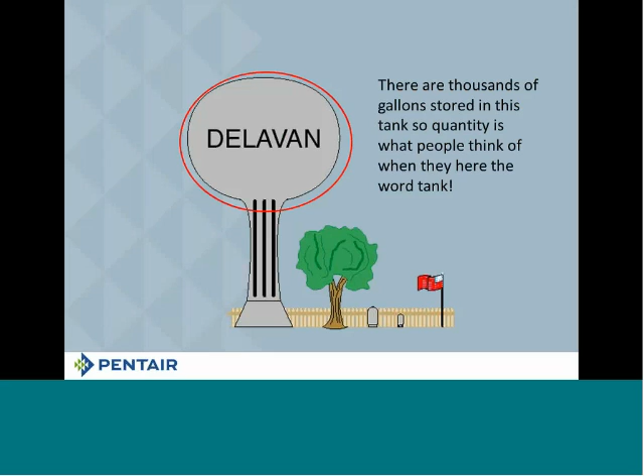When we look at this picture, you'll see the Delavan water tower. Most people see this water tower and think of the quantity of water it holds, thousands of gallons of water. So people think of a tank as being the water storage vessel. But tanks are really more than that.

What they really are is a pressure vessel. With this water tower, from the top of the water in the tower to the base, the ground level, that's the pressure we're going to have in our city systems.

So if we take that 115 feet of head that we've got here and divide it by our divisor, which is 2.31, we find that equals 49.78 PSI, which we'll round off to 50. So what we're basically saying is if I've got 115 feet of water in this water tower, there's 50 PSI on my system. Now, it would be absolutely wonderful if everybody had a water tower in their backyard.

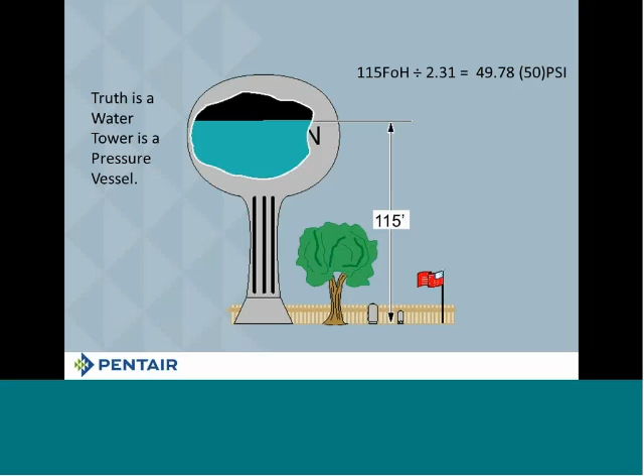Well, maybe not. Because of that, tanks were invented. This is what we call an air-over-water tank. Now, what that means, and we'll take a closer look at them in a minute, is that the air and the water are touching one another.

The next tank we're going to take a look at right next to it is called a pre-charged tank. In a pre-charged tank, there's a separator between the water and the air. And you're going to see what that does in just a couple of minutes.

On our next slide, I want you to see that there are some similarities between the two systems. For example, both systems are going to have a pressure switch on them. Now remember, all the pressure switch does is turn the pump on and turn the pump off. Both systems are usually going to have a pressure gauge.

I say usually because it's not required that you have one, although it should be. But most people have them in there because they want to see what pressure their system is at, and so they put a pressure gauge in there.

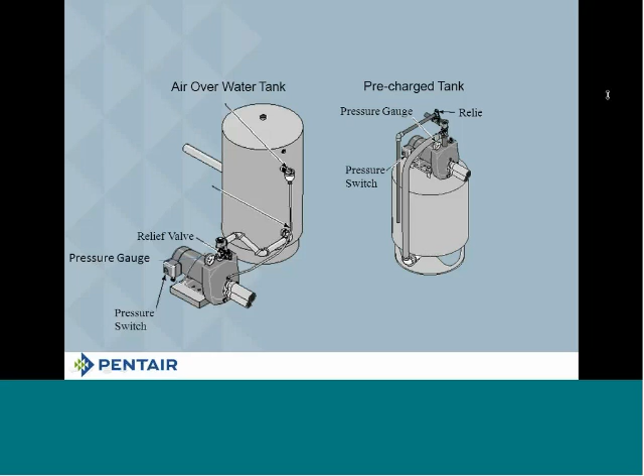If you don't have a pressure relief valve in there, shame on you. It is the cheapest insurance policy you're ever going to buy, so we would strongly encourage you to put some kind of pressure relief valve in. Should something happen and that pump not turn off, it can build up pressure that can hurt your system. So to eliminate that, make sure you have that pressure relief valve in place, just as a safety factor.

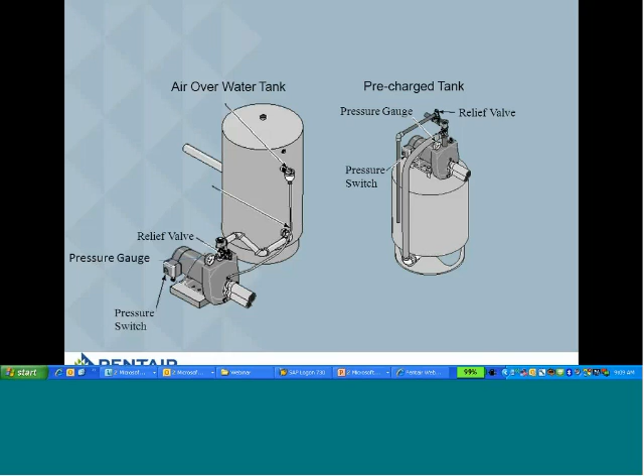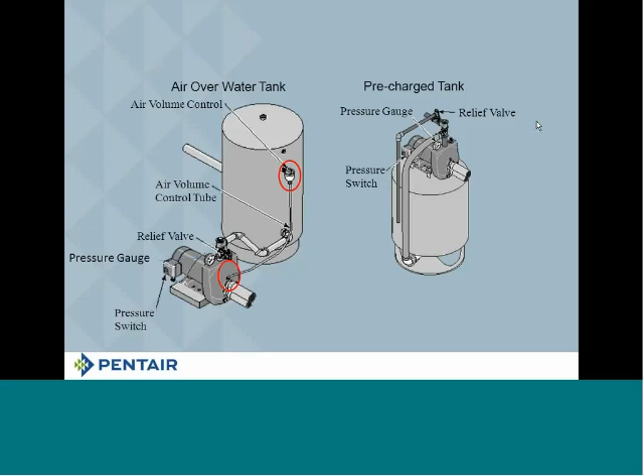Now let's start looking at a couple differences. On an above-ground system, that air volume control is going to be connected to the pump via a tube that gets connected to the suction side. We're going to show you how all that works here in a few minutes. That's part of our presentation.

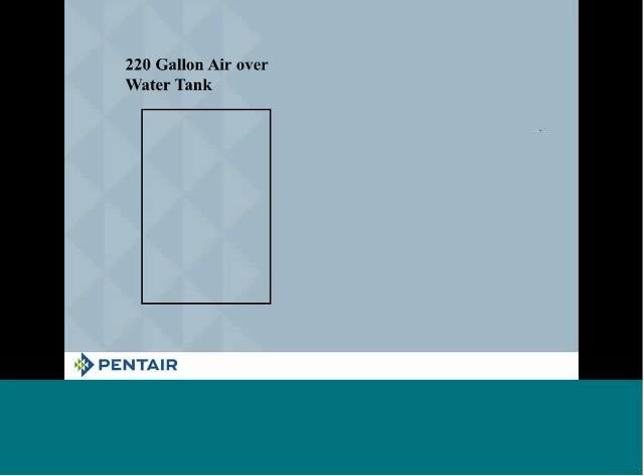So there are three basic things going on in this tank, and I don't want to call them separators because there really aren't separators in the tank. We're going to start out by telling you that this system is a 30-50 pressure system.

One of the three things in that tank is called drawdown. Drawdown is the usable amount of water you're going to have between 30 psi and 50 psi. So when the pump turns off at 50, the air pressure in the tank pushes that drawdown water out until you get to 30, and then it turns the pump back on.

So when they talk about a 30-50 pressure switch, that's what they're doing. Now, you may remember from hydraulic courses that water is incompressible. This next section is called compression water, which simply means we're going to use this water to compress something else. And of course, the other thing in this tank is air, so we're going to use that water to compress the air.

Now what happens is this: air molecules and water molecules are very similar, so of course the air molecules and water molecules start to mix. And as you pull water out of the tank, air comes out with it.

Now if you don't do anything about it, this is what's going to happen: you're going to start losing air and drawdown at the same time. Our picture here will show air and drawdown disappearing. When they disappear, the tank is now completely full of water.

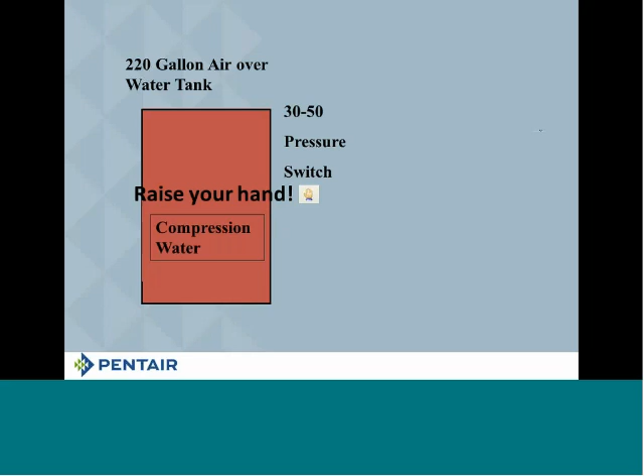So here's a question for you: what do you call a tank when there is no air in it? You call that waterlogged. Now, what's the real name for a waterlogged tank? The real name for a waterlogged tank is a big piece of pipe, because in reality, that's all that it is—just a big piece of pipe in your system.

So we're going back to our original tank here, and back to the fact that we've got some compression water. It's not completely full of compression water—we've got some air and some drawdown. Remember, we're running a 30-50 pressure switch here. With a 30-50 pressure switch in a 220-gallon air-over-water tank, according to Boyle's law, you should have about 26 gallons of drawdown. Remember, drawdown is the amount of water you get out of the tank between 50 psi, when the pump turns off, and 30 psi, when the pump turns back on.

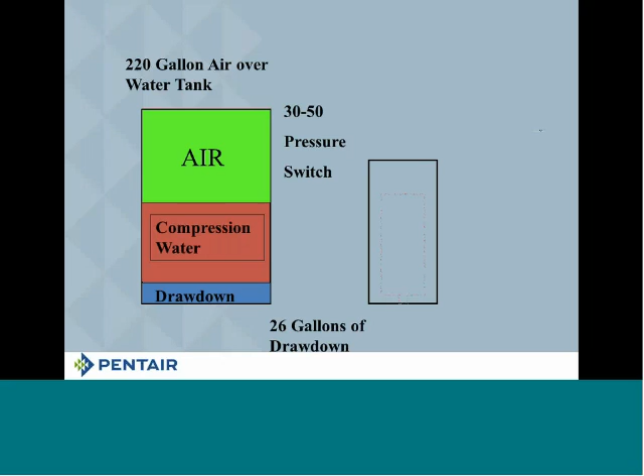This is a picture of what we're going to call a pre-charged tank. Remember, in our very first picture, you saw the two sitting next to one another—they have to share components. So while we're not going to put compression water in this pre-charged tank, we're going to use a separator. What the separator does is separate the drawdown water from the air.

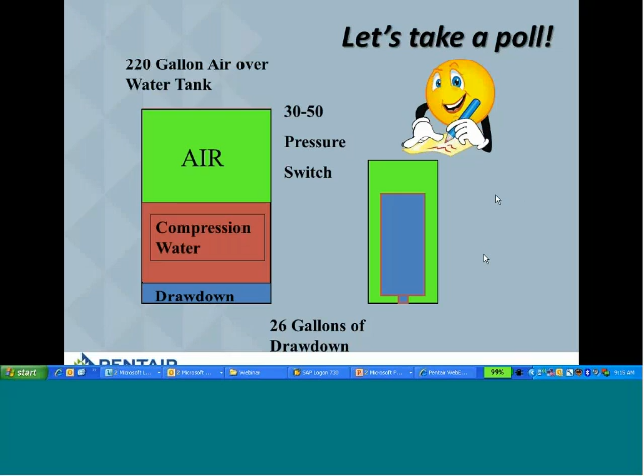At this point, we'd like to take a poll. Your choice is true or false: pre-charged tanks are less than half the size of their equivalent air-over-water tanks. True or false? Let's take a look at the answer—we've got 6 people saying true and 1 person saying false. I have to give it to the 6 people, that is a true statement.

Now I'm going to show you why the answer is true, because I always like to make sure you understand why something is happening. So first, we're going to take a look at that 85-gallon pre-charged tank versus a 220-gallon air-over-water tank. Remember, with a 30-50 pressure switch, both of these tanks will give you 26 gallons of drawdown. So here's a little math for you: if we take that 85 and divide it by the 220-gallon air-over-water tank, we find that it is only 38%, which makes it less than 50%.

Now, 85 gallons is a pretty good size tank. The next tank we'll talk about is the 19-gallon tank, which is equivalent to a 42-gallon air-over-water tank. So once again, if we do that math, we find that the 19-gallon tank is only 45% of the 42-gallon tank. So you can see the answer is true, and it will be true of any tanks you compare. If you're comparing a pre-charged tank to an air-over-water tank, you're going to save room—there's going to be a lot more room because it's less than 50% of the size.

Now, the next piece of math we're going to do is figure out what the usable amount of water is in each of these tanks.

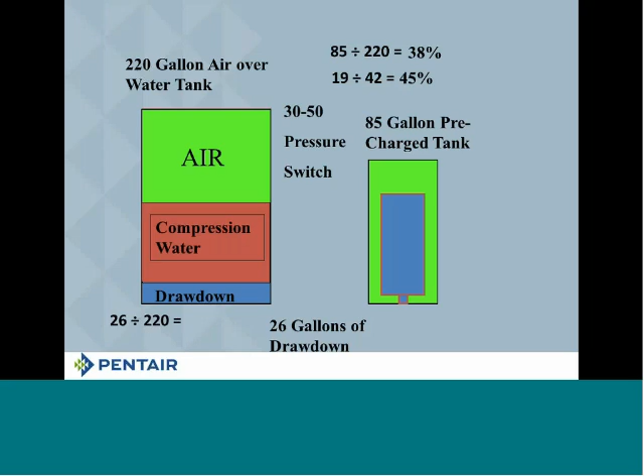So if you take your 26 gallons of drawdown and divide it by the 220 gallons possible in that tank, you get 11.8%. Basically, I tell everybody 12%. So approximately 12% of the tank size, and this goes for any air over water tank. If it is a true air over water tank, about 12% of the size of that tank is what you're going to get out of it for drawdown. So all you have to know is the total size of the tank, multiply it by 12%, and that gives you your drawdown.

Now, if we do the same thing on the 85-gallon tank, we'll take that same 26 gallons of drawdown and divide it by the 85 gallons that could possibly be stored in this tank, and you're going to find that we are now at 30.5%. I round that one down to 30%. So the important thing to remember is if you're running a 30-50 pressure switch on a pre-charged tank, as long as you know the actual size of the tank, you can take 30% of it, and that will get you pretty darn close to what your drawdown is going to be.

Now, of course, not everybody runs a 30-50 pressure switch. Some people want more pressure, so they run what's called a 40-60 pressure switch. The important thing to remember is in a tank with a 40-60 pressure switch, you're going to get 22 gallons of drawdown on that 220-gallon tank. If you take the 22 and divide it by 220, you'll find that it comes out to about 10%. Any size air over water tank, if you're running a 40-60 pressure switch with it, about 10% of that tank is what you're going to get for drawdown.

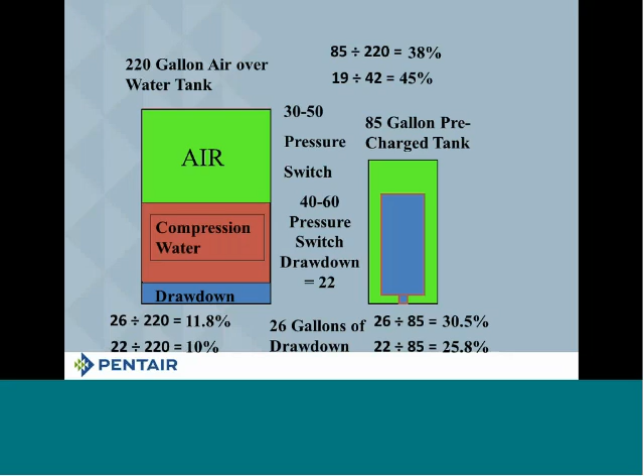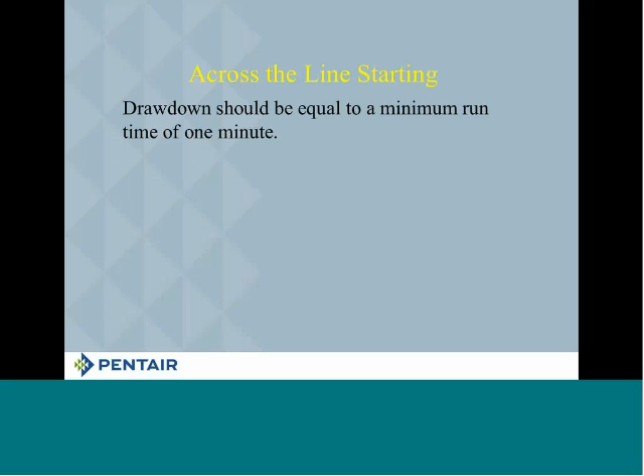So it gives you an idea of how much drawdown. Now, there's a reason why we want you to know that, and we're going to talk about that in just a second. The reason is simply this: the drawdown should be equal to a minimum run time of 1 minute. Now, pump companies and submersible motor companies have been telling you this for years and years, but I also want you to know it's not 100% accurate.

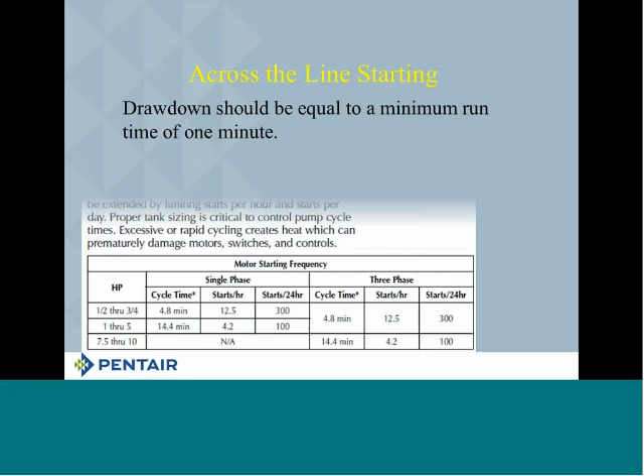Now, the reason I say it's not 100% accurate, I'm going to go to a chart that is in the PN 793. The PN 793 is our version of Franklin's AIM manual, so this chart is going to be in both books. It's on page 24 of the current book. If you look on page 24, or if you're just looking for this chart, it's 5.10, and it's titled Starting Frequency.

When you look at it here on the left-hand side, it gives you the horsepower, and it breaks it up between single-phase and three-phase motors. We are going to choose single-phase. You'll notice here it breaks the motors down by horsepower, half and three-quarter. Under single phase, there are 3 columns. If you look at the column on the right, it says starts per 24 hours. Now, the last time I looked at the AIM manual, that's all it said, was starts per 24 hours. So it's important that you understand what we're really talking about here.

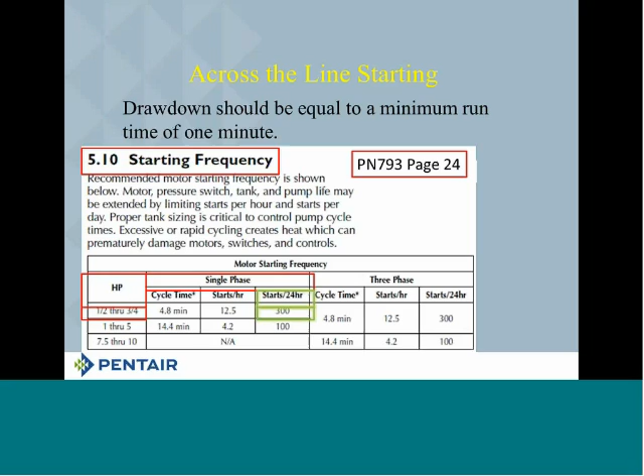It says that for a single phase, half through three-quarter horsepower motor, you shouldn't start it more than 300 times in a 24-hour day. Now, if you take that 300 times and divide it by the 24, you're going to see that comes out to approximately 12 and a half starts an hour. So column number 2 in here says starts per hour.

Notice that it says 12 and a half. If you were to divide that 12 and a half into the cycle time here, into the amount of minutes you're supposed to run between starts, you'll find it to be almost 5 minutes, 4.8 minutes. So what the chart is basically saying, and remember the AIM manual is telling you the exact same thing, is this.

If you have a half or three-quarter horsepower motor on your pump, and you're running that pump, you should not turn that pump on except for maybe once every 5 minutes. So between starts, there should be at least 5 minutes. Now that 5 minutes is made up of run time and off time, okay?

There are 2 ways to cool that motor. One is to turn the motor on and make sure you move the water past it. If you move the water past the motor fast enough, it carries away the heat and cools the motor off. The other way is to turn the motor off and leave it off for a prescribed amount of time.

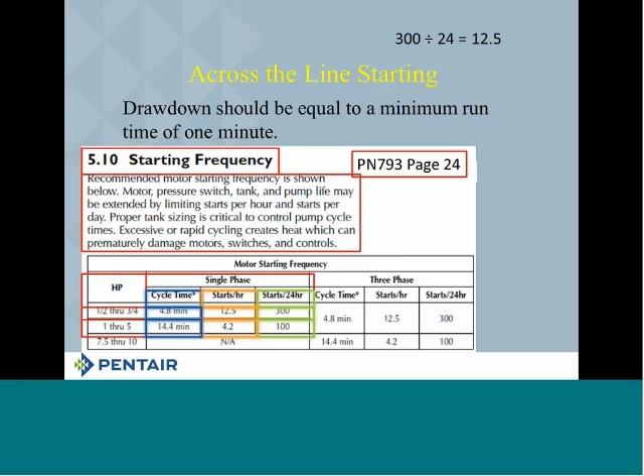All right? So this is why I have always tried to encourage you to make sure your tank sizing is proper, all right? So the next thing we're going to look at here now is we're going to ask a question. The drawdown, it says, should be equal to 1 minute. Remember, that's not necessarily true. How much water would a half horsepower, 10-gallon-a-minute pump set at 50 feet to water with a 30-50 pressure switch pump?

Okay, I have a question here. The question is, so why choose an air over water tank in lieu of a pre-charged tank?

Air will kill the iron bacteria. So if you've got a really strong iron bacteria problem and you can't get rid of it any other way, an air over water tank is one way to get rid of it. You put that air over water tank on there, and the first thing that happens is that water hits that air, and the iron bacteria dies. Now when you open up the faucet, you don't see that strong smell anymore.

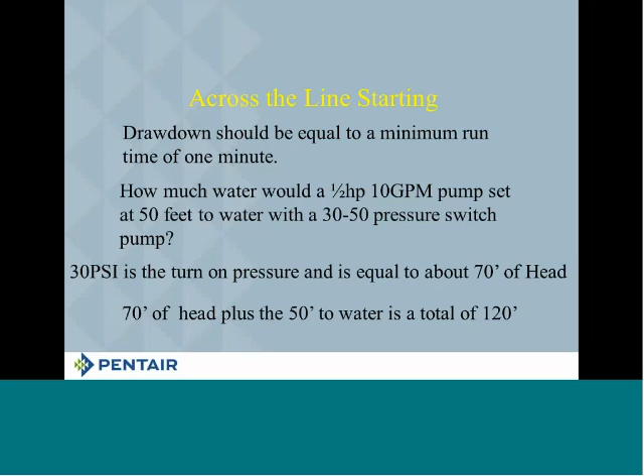How much water would a half horsepower, 10-gallon-a-minute pump set at 50 feet to water with a 30-50 pressure switch pump? We have to remember that 30 psi is the turn-on pressure, and it's equal to about 70 feet of head. I've got an illustration here I'm going to show you. If you add the 70 feet of head to the 50 feet you have to lift the water, that's 120 feet at which the pump is going to start.

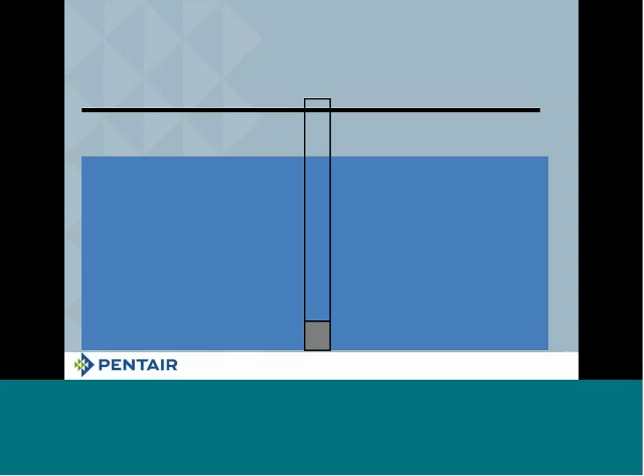So our picture shows us the ground level here. Remember, someplace under the ground there's water. We're going to tap into that by drilling a well. We'll put a screen at the bottom of the well, and then we'll put our pump in the well. We're going to bring our pump over and connect it to our tank. Remember the tank is going to have a pressure switch on it. In this case, we're running a 30-50 pressure switch.

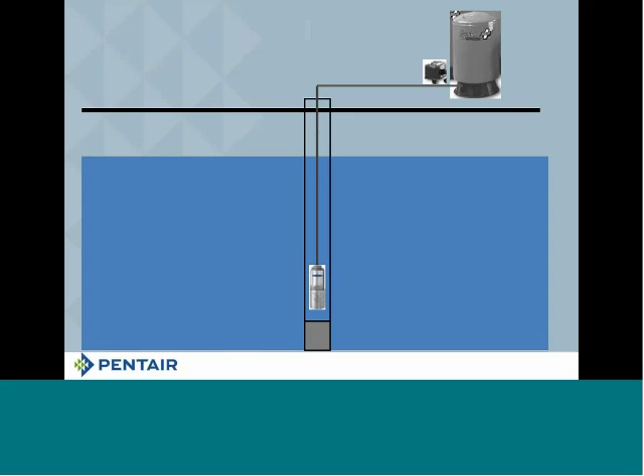So we've got a 30-50 pressure switch here, and the 30-50 pressure switch at 30 psi is equivalent to 70 feet of head. Don't forget, we're 50 feet off the water, so if we add those two together, that's how we come up with the 120 feet. I want you to understand that.

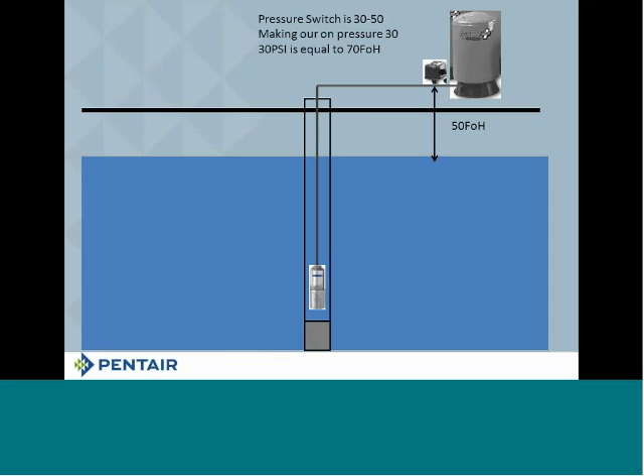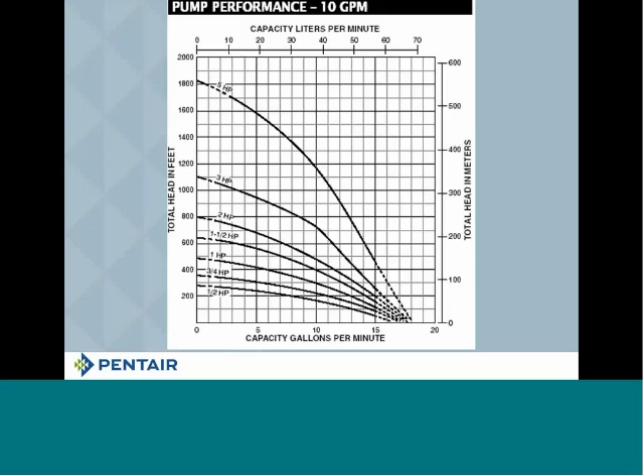And the question was, if I've got a half horsepower pump, how many gallons a minute is that half horsepower pump going to pump at 120 feet? So if we draw a line from the 120 feet to the half horsepower pump, straight down, you'll see we're at about 11 and a half gallons of water. Now I am going to be very generous with this pump, and I'm going to say it is 11 gallons. You'll see in a minute why I'm saying this generously, because the more water you have, the worse the situation is going to be.

I have seen people who have put a 1.5 horsepower pump in the same scenario. So the question is, what is the 1.5 horsepower pump going to do? We're going to go back to that curve, and now we're going to find that 1.5 horse line and draw a line straight down from where the 1.5 horse line crosses the 120 feet. That gives us approximately 15.5 gallons a minute.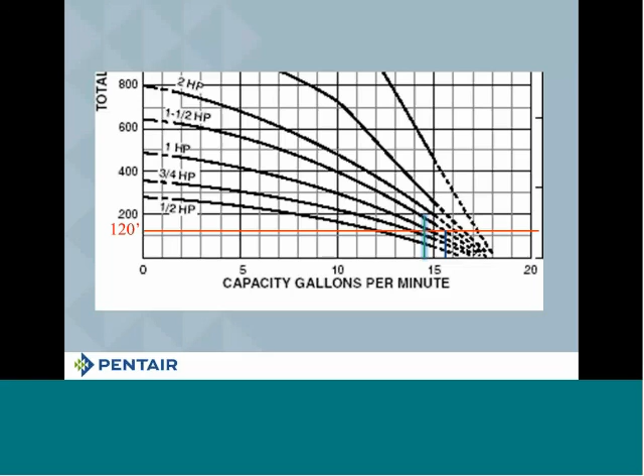So it's very, very important that you try not to do this, although I have seen cases where, yes, indeed, it happens. It happens. Okay? So we're going to be, again, generous and say 15 gallons a minute.

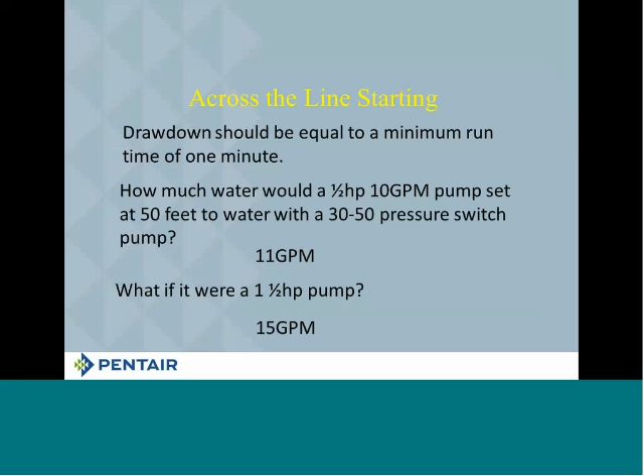Now, let's show you where we're really going with this, because what we're really going to do with this, we want you to take a little poll here first. This poll says the most popular tank sold in the United States.

You have a choice. Is it the 19-gallon pre-charge tank? Is it the 35-gallon pre-charge tank? Is it the 50-gallon pre-charge tank? The 85-gallon pre-charge tank? Or the 119-gallon pre-charge tank?

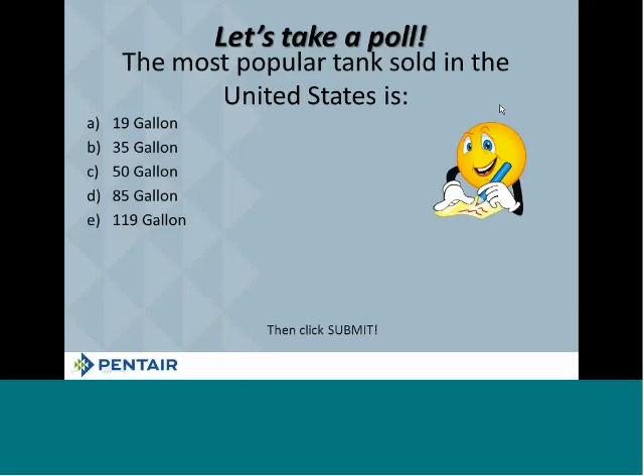The right answer is a 19-gallon tank. So the most popular tank sold here in the United States is that 19-gallon tank. And I do appreciate those of you that picked the 85-gallon, the 119, you're doing the right thing. But unfortunately, most people don't do that. Most people pick that 19-gallon tank.

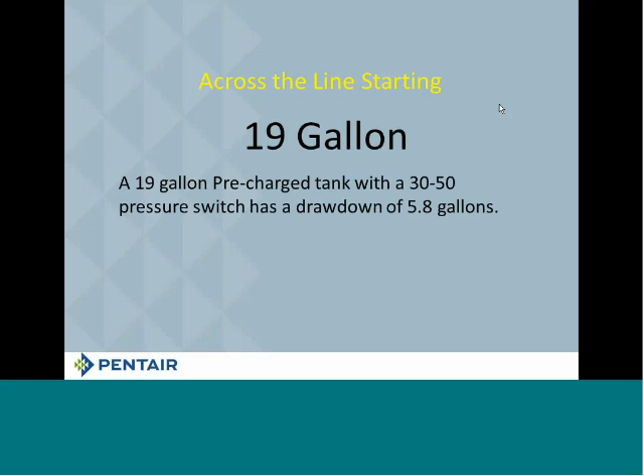All right? So the 19-gallon tank, remember, we're putting a 30-50 pressure switch on the system here. So the 19-gallon tank with a 30-50 pressure switch is going to have about 5.8 gallons of drawdown to it. Okay? So what would the run time be for the half horsepower pump? Well, if you divide that 5.8 gallons by the 11 gallons that the pump is going to put out, you're going to find that you get approximately a 32-second run time.

If we do the same thing with the 1.5 horse pump, we will see that if you divide the 5.8 by 15, because remember, now we're doing 15 gallons a minute, we're going to get a cycle time of about 20 seconds. Now that's 20 seconds on.

All right? Now, let's go back to our example. If in our example we are taking a shower, all right, most shower heads are going to give you 2 to 2.5 gallons a minute. Probably closer to 2 at 50, 2.5 at 60 psi.

So if the shower head takes 2 gallons a minute, the tank holds 5.8, we'll call it 6 gallons for simplicity, and the pump is doing 11 gallons a minute.

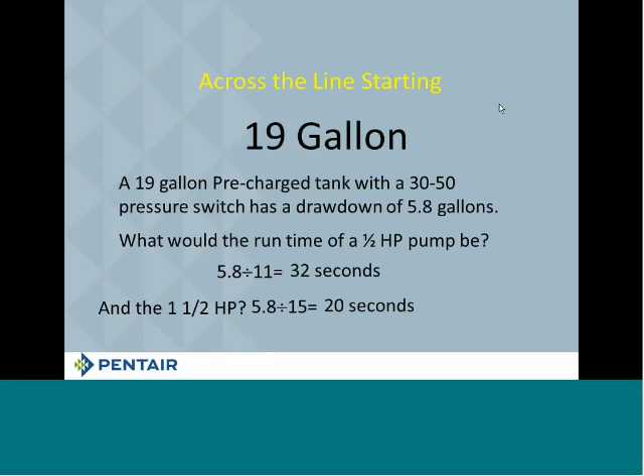Okay, now everything that I've told you for the last 40 minutes, forget it. The reason I want you to forget is because we're going to talk about VFDs here for a second. When you have a variable frequency drive...

It's very important that you understand that the pre-charge in that tank is different. And of course it's different because you'd like to see that ratio. Remember what the ratio was: 30% water, 70% air. If we had a 30-50 pressure switch, we were running 30% water, 70% air. If we had a 40-60 pressure switch, we were running 25% water and 75% air.

So what we're suggesting to you is 70% of the set point. So if you are going to choose a tank and you want the set point in the system to be 60 psi, what we're recommending you do is take that 60 psi times 70%, and now you're going to put 42 psi in that tank so that you get the right amount of drawdown out of that tank. So that's what we're going to recommend.

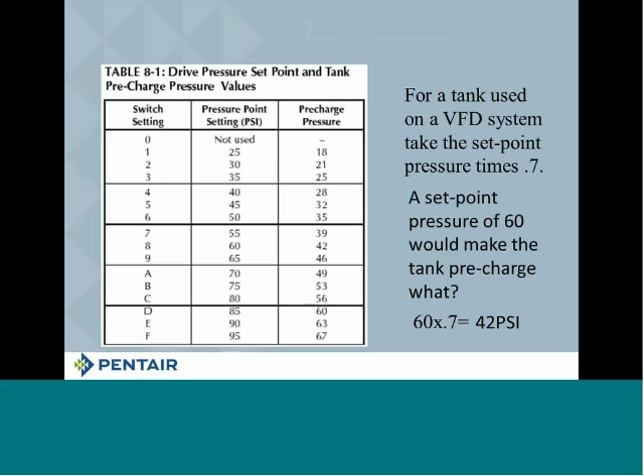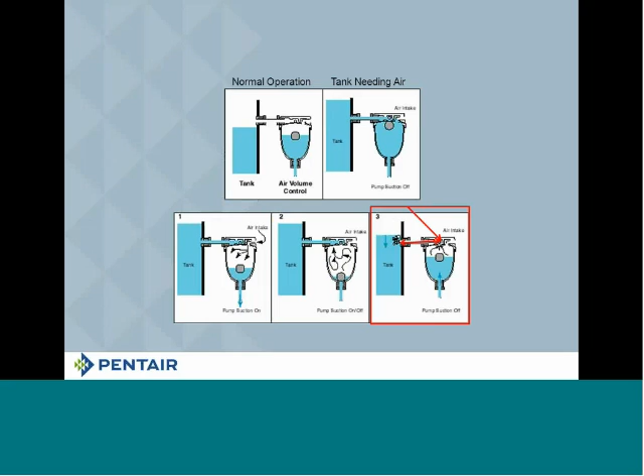The last part of the cycle takes us over to box number 3. What's happening here is the pump shuts off, and because the pump shuts off, there's no more vacuum on that big ball. Because there's no more vacuum on the big ball, there's no more vacuum on the little ball. So now what winds up happening is we get a mixture of air and water. Air moves into the tank, water moves into the cup, lifting up the big ball.

We're going to move on then and take a look at how you would do this with a submersible pump. Now remember, with an air-over-water tank and above ground pump, you can waterlog the tank. Remember, a waterlogged tank is nothing more than a big piece of pipe.

When you are doing a submersible pump, you are going to use a little different method. You'll notice down here in the well, generally about 10 feet below that check valve, you're going to put in a bleeder orifice or two. What the bleeder orifice does is this.

When the pump turns off, the check valve holds the pressure from the system up in the system. The pressure down here on the pump is relieved a little bit, which allows a little ball that floats in that bleeder orifice to float up and allows the water to flow out. So the water flows out back down into the well, and air fills up that section of pipe.

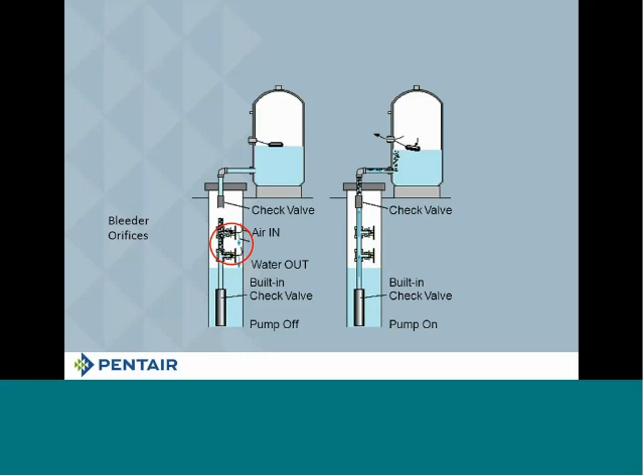So that check valve is very important. The placement of the check valve is very important. You want it near the top, about 10 feet above the bleeder orifice.

Now, the next thing that's going to happen, you'll notice when the pump turns on, the water pushes the ball against the hole and closes the hole. All the air that was trapped in that 10 feet of pipe is now being pushed up with the pressure the pump is making and into that tank. As that air goes up into the tank, what winds up happening is we've got something that is made by Robertshaw.

Basically what it's got there is that paddle on the end. As the air comes in, the paddle drops down. In this section right here that screws into the side of the tank is going to be a snifter valve. As that paddle drops down, the snifter valve is pushed open by the weight of the paddle going down, and that allows excess air to escape the tank.

In other words, when you have a submersible pump, the problem is not going to be waterlogging the tank, the problem is going to be air locking the tank. So to prevent that air locking, you use a Robertshaw and therefore allow some of this air to escape.

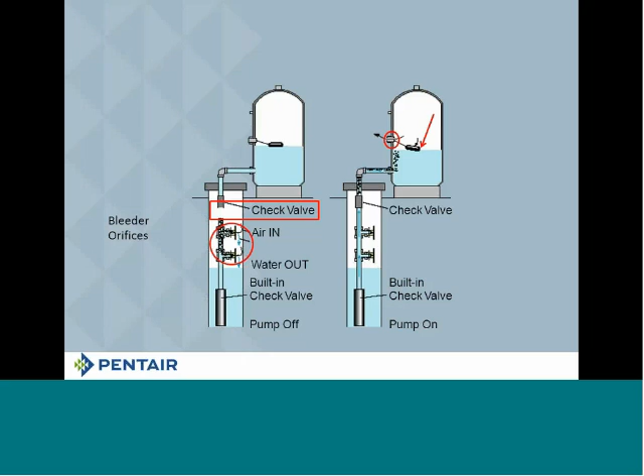And then I step back, and I don't know if Butch got the sale or not. All right? Now, the next thing we're going to talk about here is construction of the tank.

And you're going to notice that it has a cold rolled steel construction outside shell. Okay? It's 14-gauge steel. You can see it's going to be welded. We're going to roll the body and then weld it right down the middle.

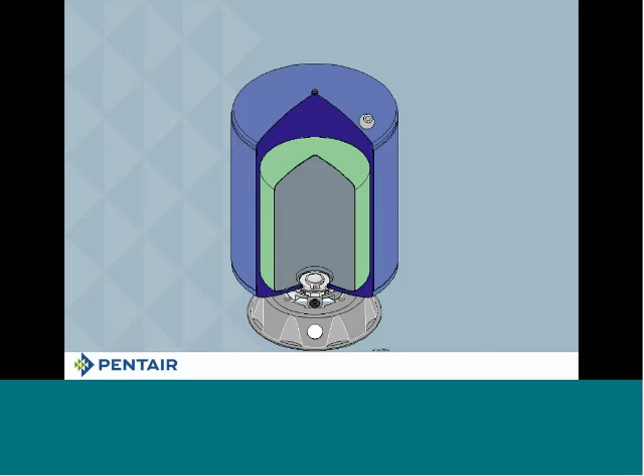If the tank is a vertical tank, you're going to have a bag in here. We've redesigned the tank so the bag will expand and fill the whole inside of the tank. We're redesigning this from our old CA, or captive air, tanks.

By the way, I just talked to a gentleman last week who called me up and said, I have a 16-year-old CA tank, do you think it's worth selling? My answer was no, it's not worth selling at 16 years old - don't be silly. But it does show that these tanks do last.

In the old CA tank, we had a smaller bag, and when the tank ran out of air, the bag would explode. So we redesigned this bag so it will completely fill the tank without exploding. That was the purpose of that part of the redesign.

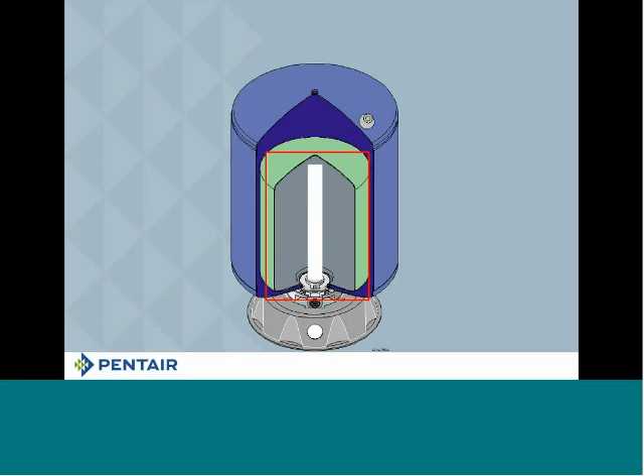Another part of the redesign was, on occasion, the tank bag would collapse, and instead of letting all the water out, it would fold in on itself, cover the hole, and you couldn't get all the water out. So we put a standpipe in there.

We realized very quickly that that standpipe had to have a hole in the bottom of it, because you had to equalize the pressure inside the standpipe. Otherwise you'd create a vacuum in there and suck the bag in. That didn't work very well, so we had to change things a little from our original design. But now it works, and we've got that standpipe in there to help us empty the tank out completely.

So now what happens is the air is on the outside of the bag, and you can see it collapses the bag from all directions. With that standpipe in there, that's going to force all the water out, which is what you want. If you've properly charged your air tank, there will be maybe a cup of water in there when that pump turns back on - a very small amount of water when that pump turns back on.

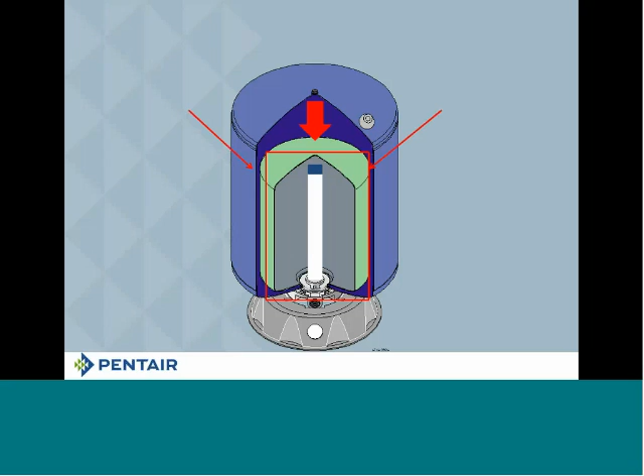So now I'm going to show you a picture of our family of PS tanks. Remember, PS means we are using a rubber snifter valve that's going to be underneath that plastic cap there. You can see by the horizontal tanks here, we've got a plastic flange.

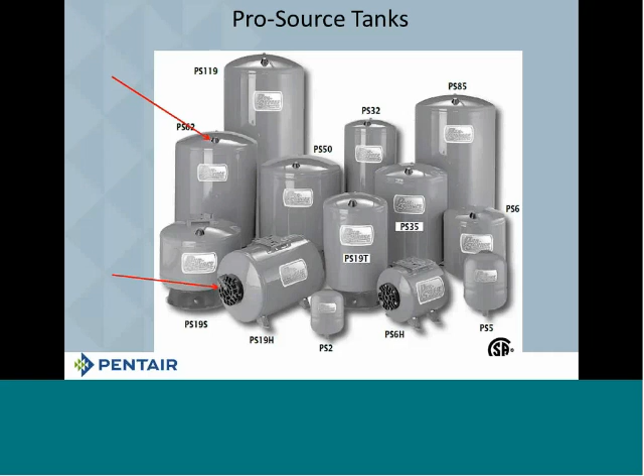On our ProSource Plus, or PSP tanks, you're going to see that now we have a steel snifter on there. Along with that steel snifter, we are going to put in a stainless steel flange. It is designed to have a hole in the exact same spot so you can change one tank out for the other - you can even change that tank out for an old CA tank. Most tanks have their opening in the exact same spot.

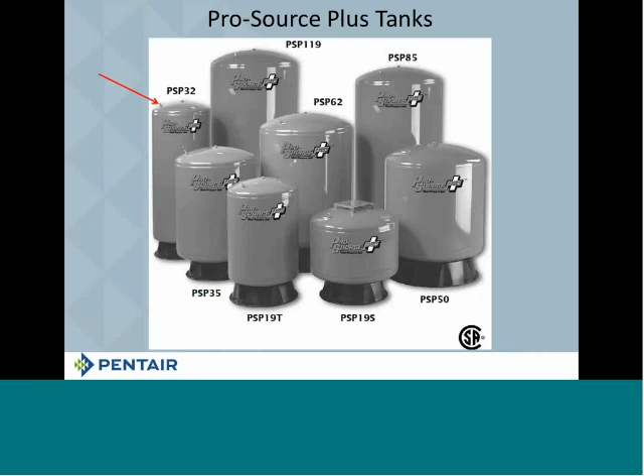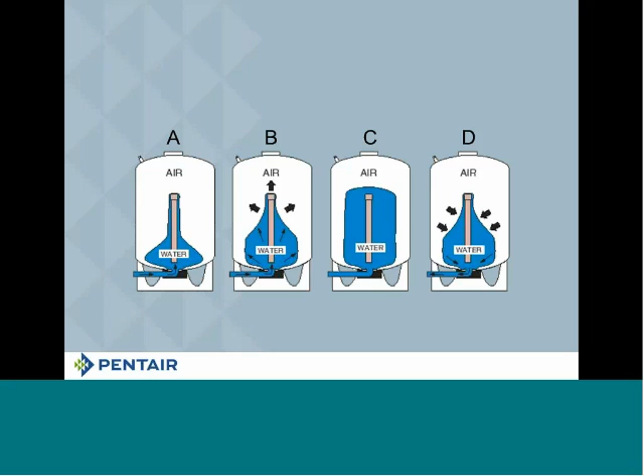This next illustration here, and I'm calling it an illustration because that's exactly what it is, shows what happens inside the tank. In tank A, the pump is just turning on and we're filling the bag up with water. Tank B shows that as we fill that tank up with water, we are compressing the air inside the tank. Tank C has the bag full of water - again, it's an artist's conception, because the bag is actually going to be touching the outside edge of the tank at the bottom. And D shows how that air decompresses as our pump is turned off, and now we're relying on the pressure inside the tank to feed our system.

All right, so true or false?

Bigger is better - the answer is true. Bigger is better when it comes to tank sizing.

Let's show you why we believe this to be the case. We're looking in the Sta-Rite catalog, page 114 - not sure if this is this year's catalog or last year's. But you'll notice there is a tank selection chart, chart A. There are actually two charts, chart A and chart B.

Chart A is a tank selection chart, and it's going to tell you: are you running a 20-40 pressure switch? Are you running a 30-50 pressure switch? Or are you running a 40-60 pressure switch? So it's asking you which pressure switch you're going to be using.

Now, right underneath the pressure switches, it gives you what is called the run times. I'm going to pick the 30-50 one. It's got a 1-minute run time, and right next to that, a 2-minute run time. If you look to the left-hand side of the chart, that column says pump flow in gallons per minute.

Now remember, you need to do like we did before - calculate what the pump is going to do, not what the pump is rated at. Our pump was rated at 10 gallons a minute, but as a half horse, it was going to do 11 gallons a minute. As a horse and a half, it was going to do 15 gallons a minute.

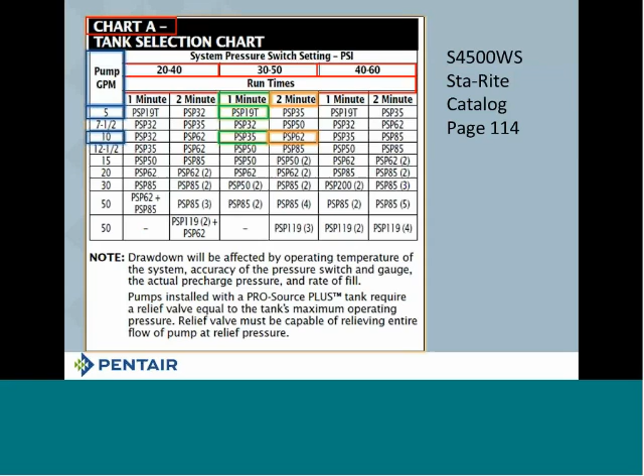Now, there is another way to check it, and I'm going to guess that page 115 in your 2011 book is what we're going to look at - I think it's page 113 in your new book. And what this page shows us is the chart that's in the book, and it gives you the tank model numbers on the left-hand side.

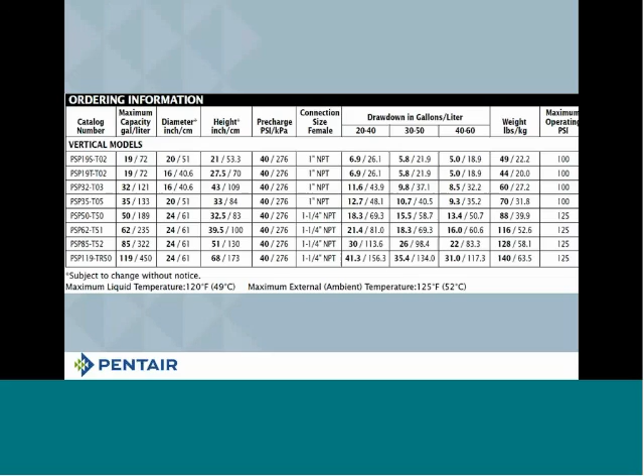Remember what I said, 30% for recharge tanks based on the maximum capacity, and that's what this is telling you. So you can take 30% of each one, and it's going to come out to the answers you're going to see here in a second. Then it gives us some dimensions - your diameter, your height, the pre-charge at the time we send it out of the factory, and your connection type. Remember, we're using female on the tank, so it's an NPT 1 inch for 35 or less, inch and a quarter for 50 or more.

Then you've got your next column, which is going to be your drawdown in gallons or liters, and with that, it gives you your three pressure settings that people most often use: 20-40, 30-50, 40-60.

Now, this chart works a little differently. In this chart, you're going to pick your pressure setting, and then you're going to go down to the flow rate that you're looking for. So we're looking for about 11 gallons a minute. Right there, we got 10.7.

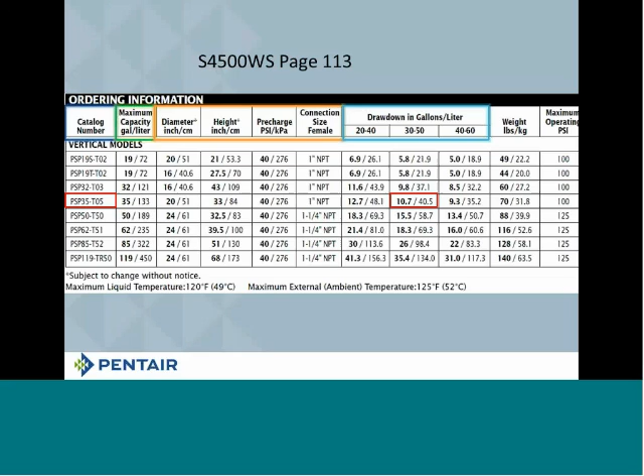So with that half horsepower pump, we're saying we need at least a minimum of a PSP 35. That's the minimum, is a PSP 35. Everybody understand that? If we wanted to, we could double that, and you look at that 18.3 is your 62-gallon tank there, so you can see what you'd be getting out of there. So it's very important that you understand how to do tank sizing. All right?

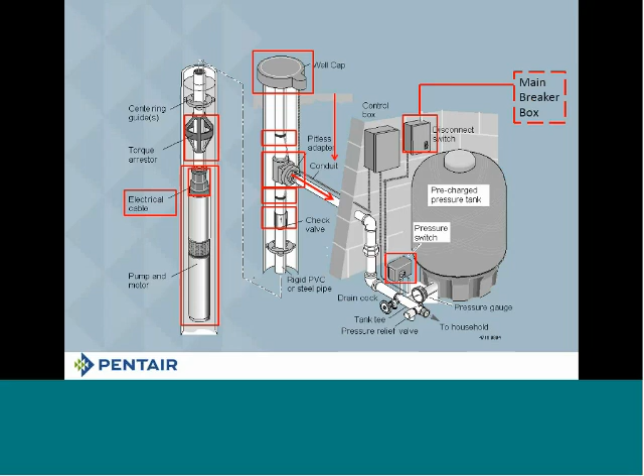You're going to go from the disconnect switch to the pressure switch. If you're using a 3-wire pump, you're going to go from the pressure switch to the control box. If you are using a 2-wire pump, you're just going to go right straight down the well. That makes up your electrical system.

Now on the inside here, we've got our pre-charged tank. There is a pre-charge in this tank. You have to make sure that it is set properly when you are going to use this tank. We mentioned we're going to put most of those tanks out there at 40 psi. So if the tank is at 40 psi and you're running a 30-50 pressure switch, you will have problems with that tank if you do not let some of that air out. You should have about 28 pounds of air in there with a 30-50 pressure switch. With a 40-60 pressure switch, 40 psi, you want to take a couple pounds out. So just make sure that you check it.

Remember, it's like a car tire, it's going to lose air. If you don't check it on a regular basis... we give you a 5-year warranty, but that warranty is for manufacturer's defect. Air in the tank is not a manufacturer's defect, that's something somebody has to check. If you don't want to check it, have your customer check it, show them how to do it and tell them to do it. Because if it's not done and that tank fails, technically, I'm saying that with a bunch of salesmen on the line, they will probably argue with me, but technically, it's not a warranty. Just so you all understand that.

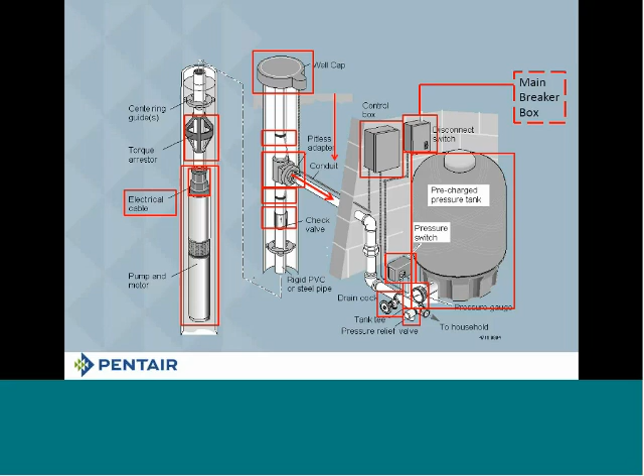And then lastly, I mentioned this earlier, and this is so extremely important: put on a pressure relief valve. And I know some of you are thinking, well, what the heck, I got a pressure relief valve at the hot water tank, why do I need another one? Because it could save your life. What I mean by that is this: if that tank blows up, it can hurt somebody, it can kill somebody, or it can destroy property, which eventually could wind up destroying your livelihood.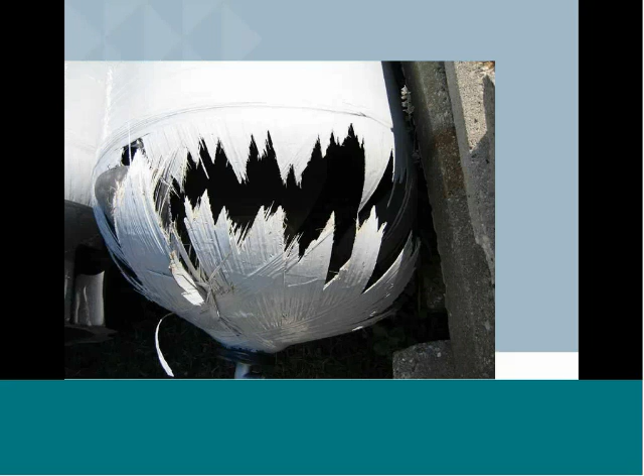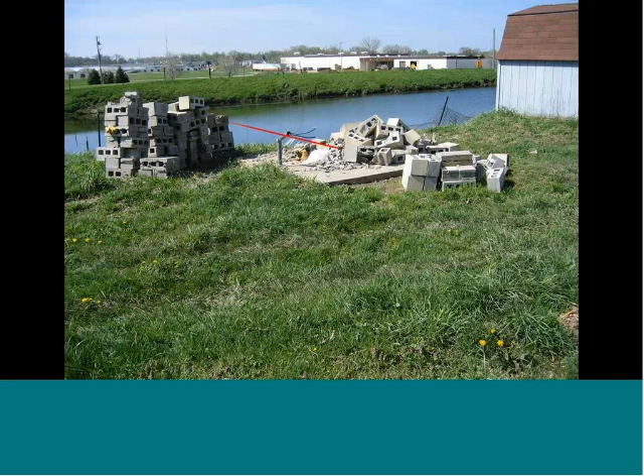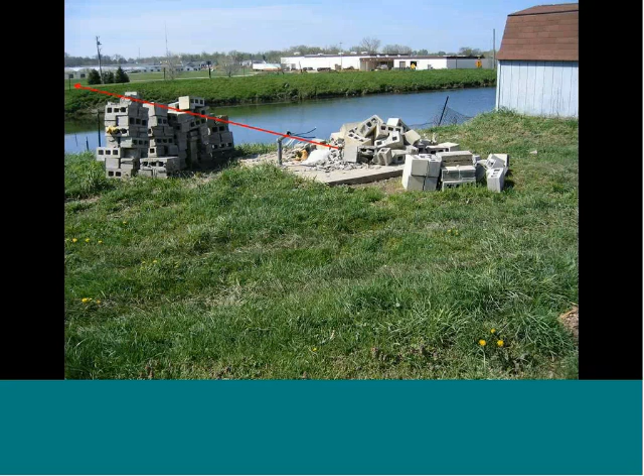So this one's not so bad, but if you look at this next tank system here, what wound up happening was the pump didn't turn off. So because the pump didn't turn off, you can see this was a rocket. It took off from this block building, and it went 200 feet across this little channel and landed in the street over there. There was a woman whose house is not in the picture, but to the left-hand side where that arrow was pointing, there was a house, and a woman was sitting on the front porch and saw the whole thing. Look how it just blew those blocks right off the concrete pad there. Trust me, if you'd have been in there, you wouldn't have wanted to be in there.

So this is why we say be very, very careful and make sure that you get that pressure relief valve on, because the life you save could be your own.